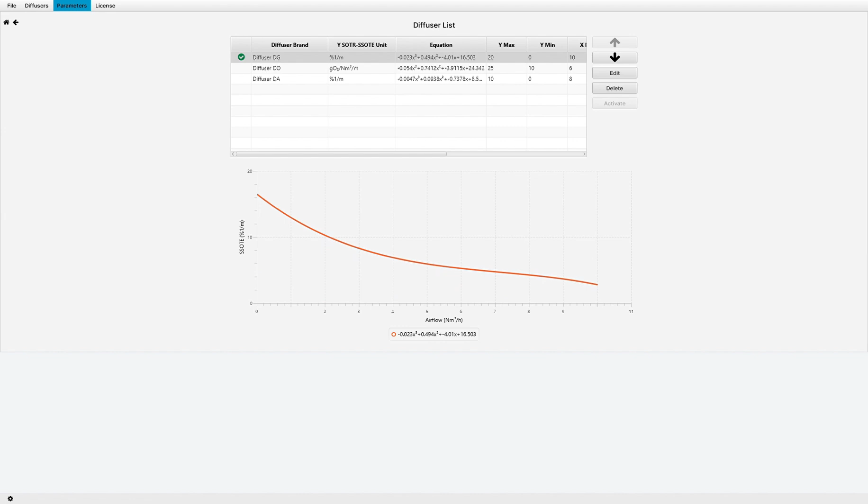Introducing ProfPRO, Advanced Wastewater Treatment Plant Design Software. An all-in-one package offering a complementary design. Before starting up the software, at least one diffuser graph should be introduced to ProfPRO. You can then select and compare different diffusers in the calculation step. Let us show you what ProfPRO is capable of.

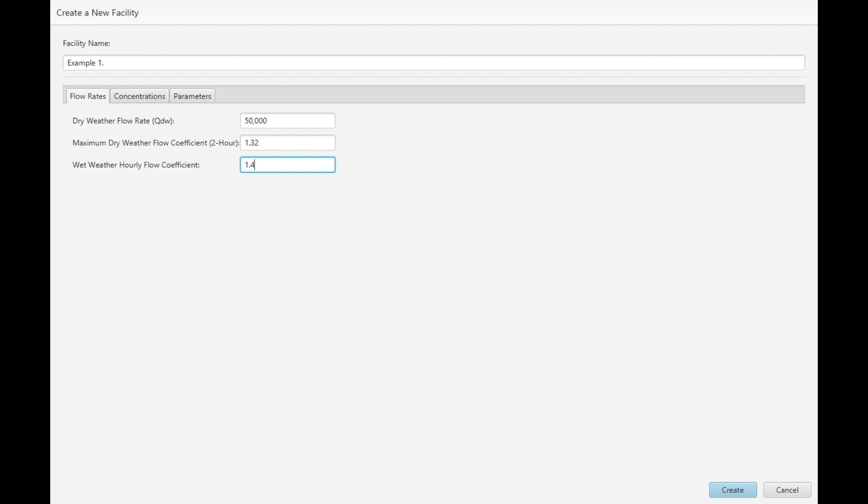By clicking the New Facility button, you will see a pop-up screen in which you will be asked to fill some crucial information about the treatment plant prior to the calculation step. Important parameters for the calculation can be set to desired values before the calculation while creating a new facility. These can be viewed and changed later in the Parameters tab.

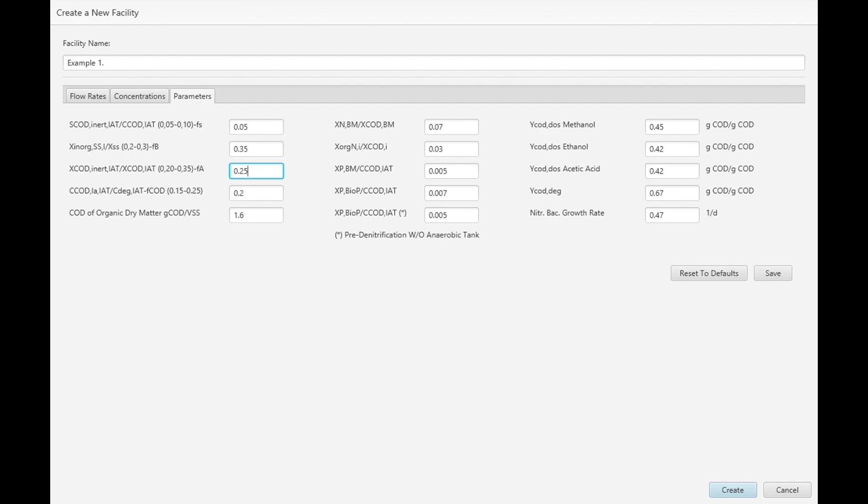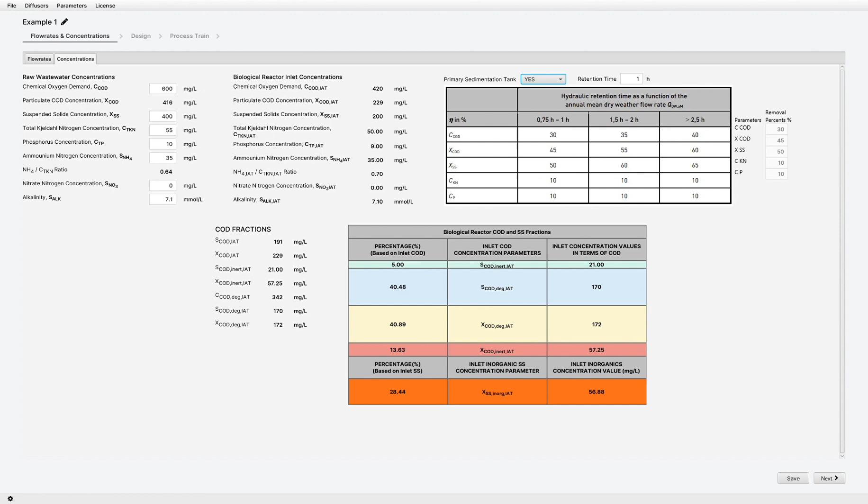After filling the crucial information, you will be welcomed by the flow rates and concentrations page. You can view and change concentrations and flow rate of the treatment plant in this page. If there is a primary sedimentation unit, you can select retention time or customize primary sedimentation treatment efficiencies in this page. ProfPRO also gives you a hint about the COD fractions of your influent wastewater.

Now proceed to the designing page via the WWTP design button. Let's start with primary treatment. Coarse screen, inlet pumping unit, fine screen, grit and grease chamber, and primary sedimentation tank will be showcased. During this time, I will let you enjoy the smoothest designing steps of the whole primary treatment unit section.

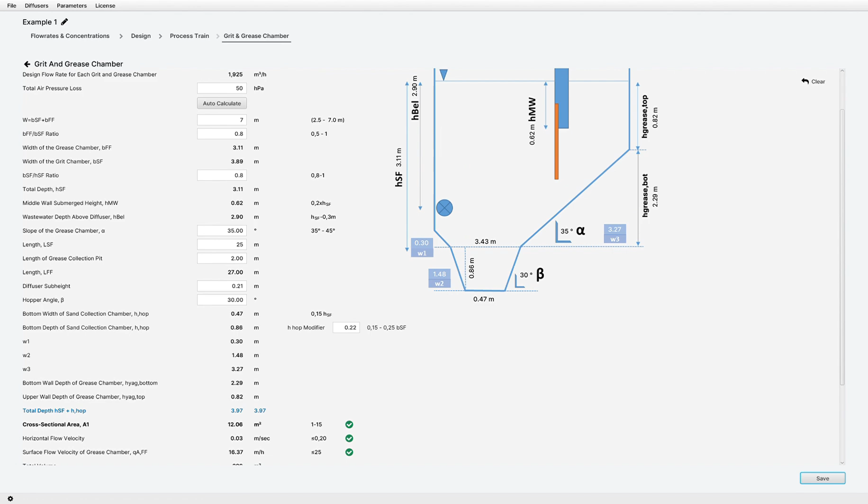So easy. Now that the primary treatment section comes to an end, we can proceed to the biological treatment section. Secondary sedimentation tank, return sludge pumping unit, sludge age and biological reactor calculations, internal recirculation calculations, alkalinity and sludge treatment units are about to get involved in the design.

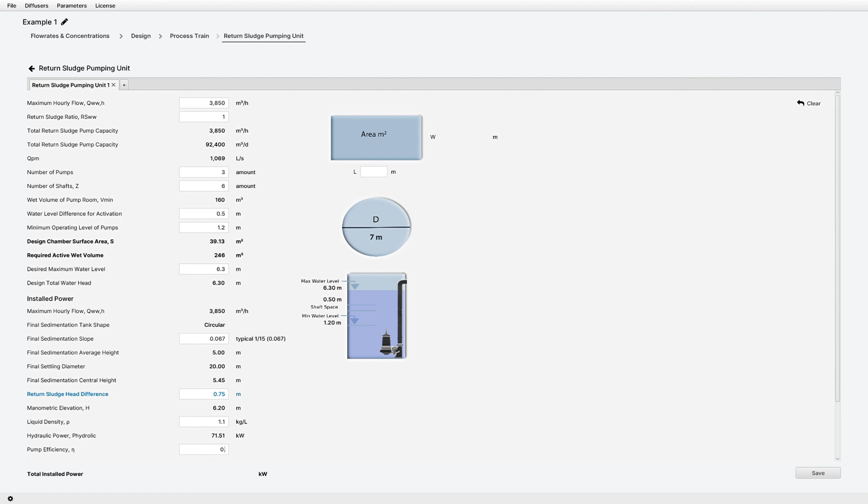Treatment options is the part of the design in which you can specify the details of the treatment objectives. You can choose between carbon removal with nitrification, and carbon removal with nitrification and denitrification. Additionally, a phosphorus removal step can be incorporated into any of these treatment options using chemical methods, biological methods, or a combination of both.

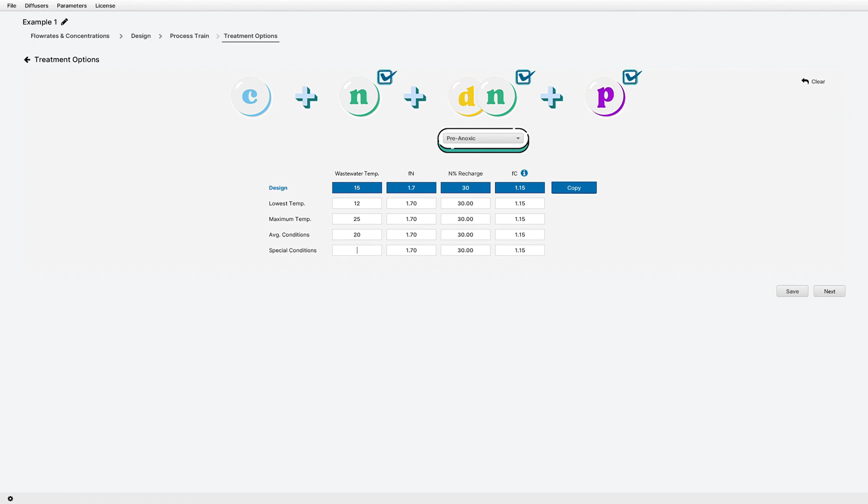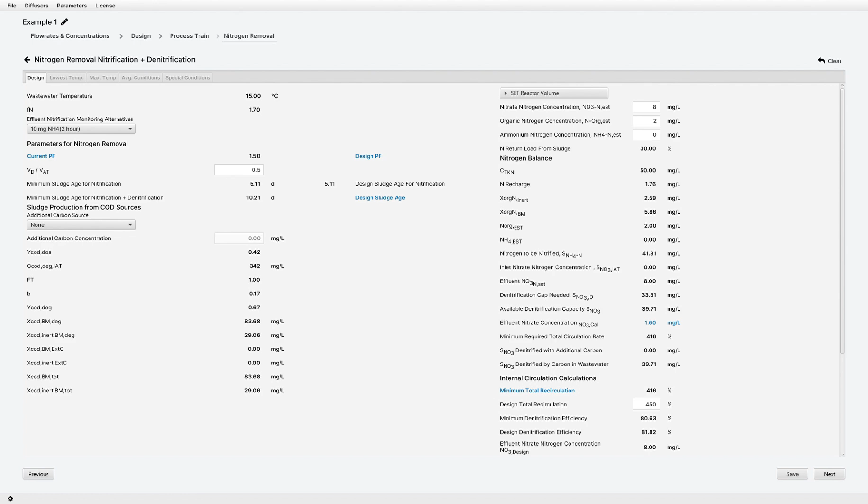Regardless of the treatment options you select, you are required to go through all the biological process steps. For example, in this configuration, you must first enter the essential data for nitrogen removal, followed by the necessary inputs for phosphorus removal. After that, proceed to the sludge production section to define the biological tank volume. Once the tank volume is set, you can return to the nitrogen removal section to perform calculations under different temperature scenarios.

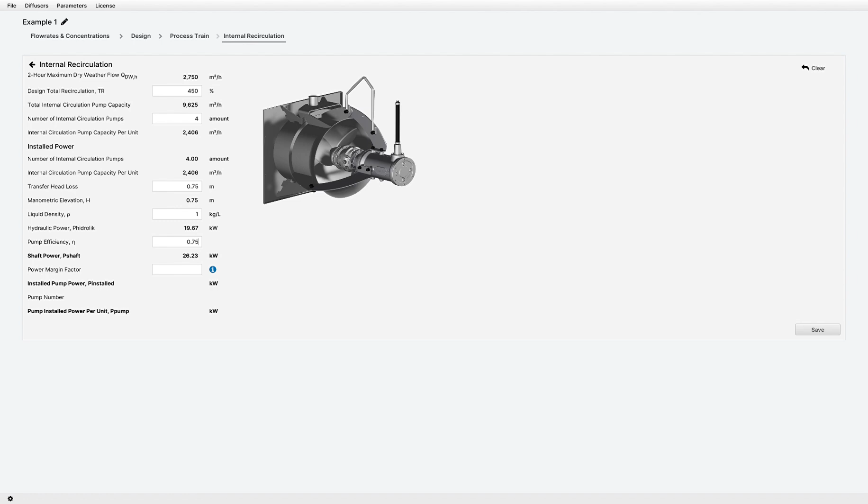In the sludge treatment line, processes such as sludge thickening, anaerobic digestion, sludge dewatering, and sludge drying can be included in your design. The sludge line can be fully customized based on your specific needs by selecting or deselecting each individual treatment step, allowing you to tailor the process to your project requirements.

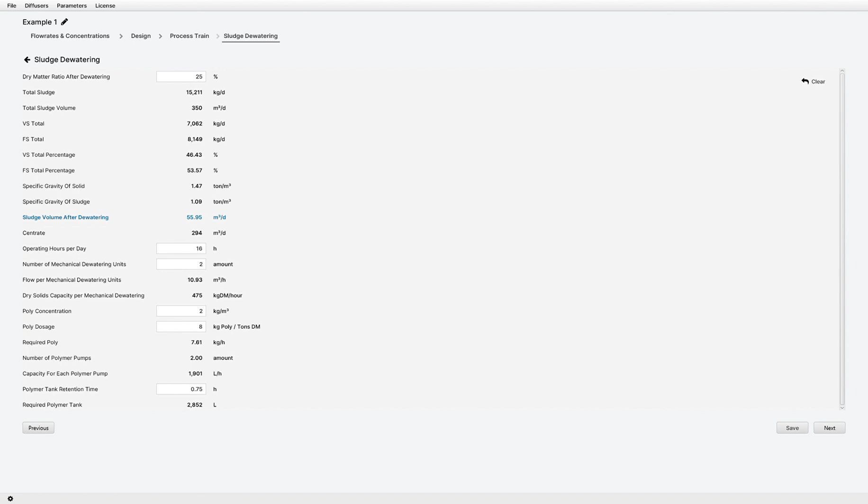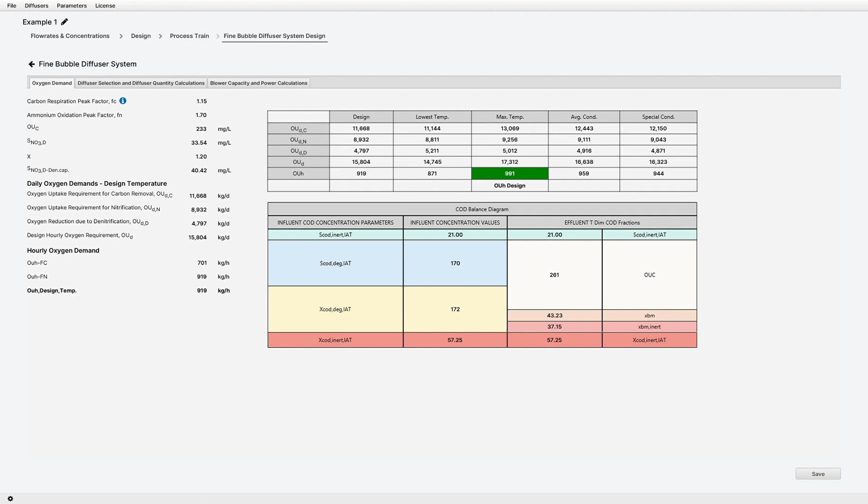In the aeration system design module, you will be provided with oxygen uptake rate calculations for all the scenarios defined in the nitrogen removal section, along with a COD balance diagram for comprehensive analysis. You will also have the option to choose from various diffuser types introduced in the Diffusers tab of the software. These can be compared side by side to determine the most suitable option for your design.

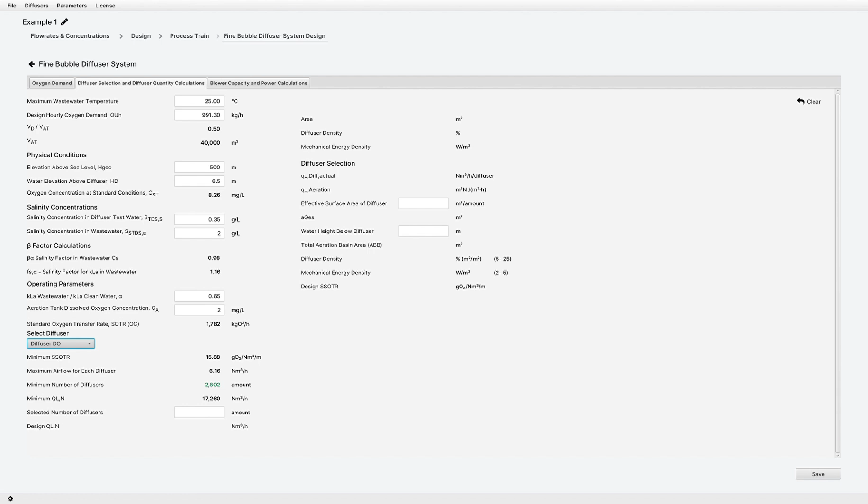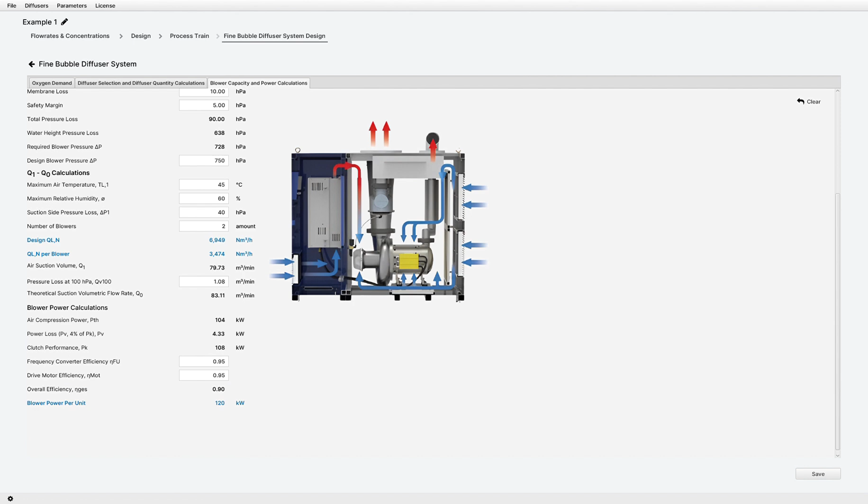Once the diffusers are selected, you can proceed to the blower sizing section to calculate the number of blowers required for your system. ProfPRO also offers an estimate of the area requirement. Taking into account all selected units and processes, the software calculates an approximate total installed power for the complete wastewater treatment plant.

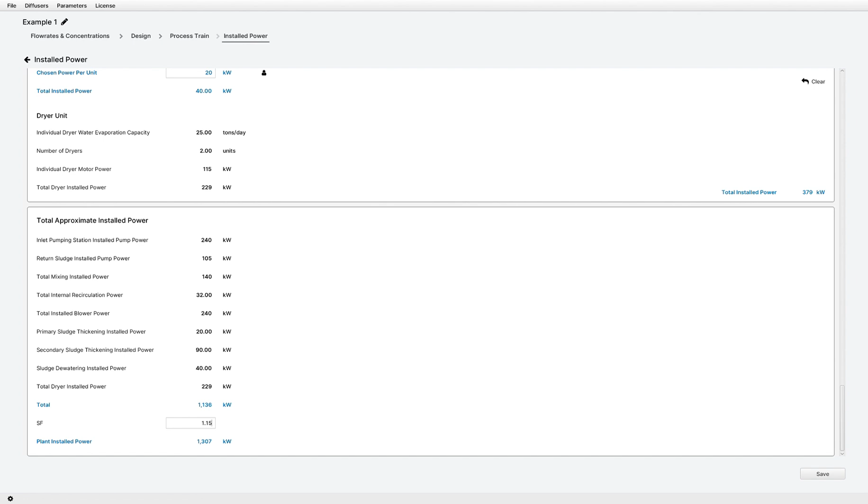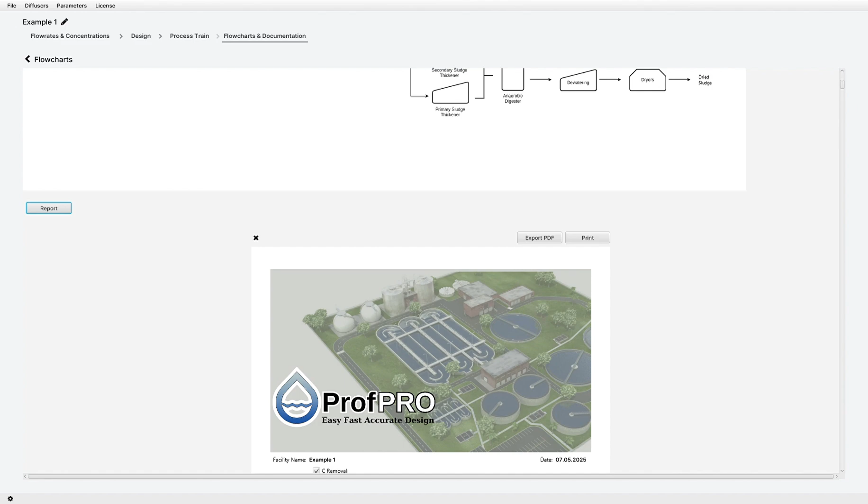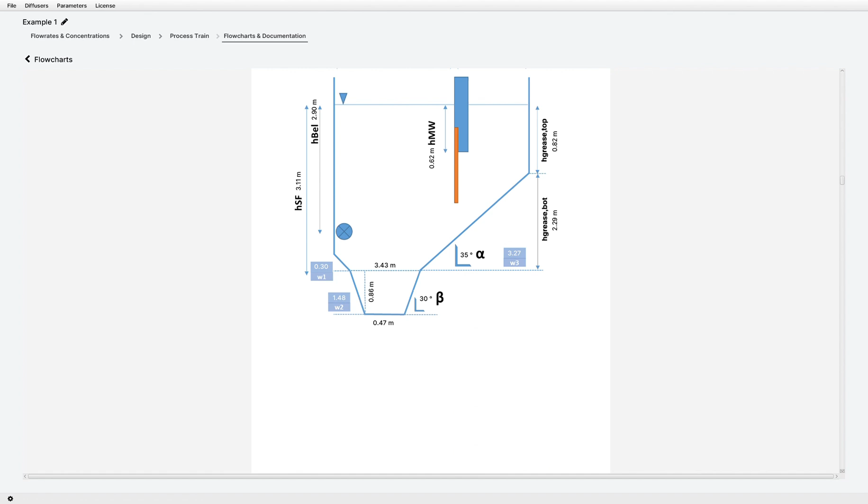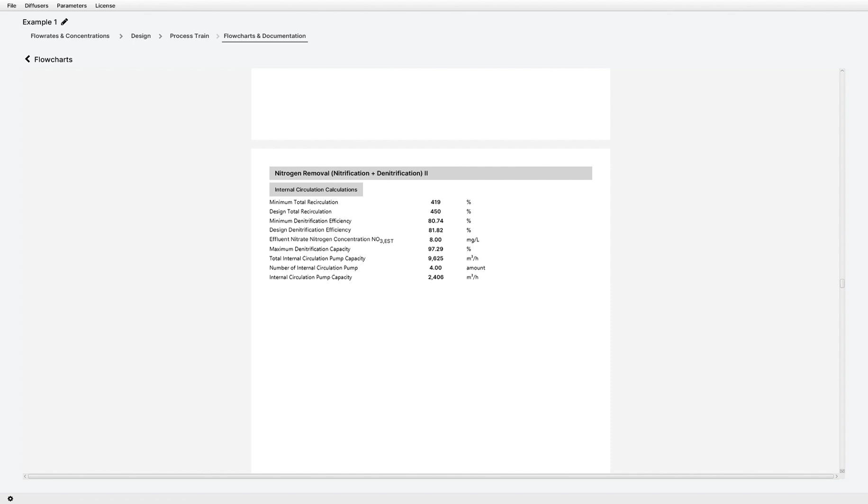Lastly, on the flowcharts and documentation page, you will be presented with a flowchart representing the treatment plant you have designed. To review all your work, simply click the Report button. After selecting the components you wish to include, a comprehensive, finalized report will be generated and displayed on this page. You may directly print this report or export it to a PDF.